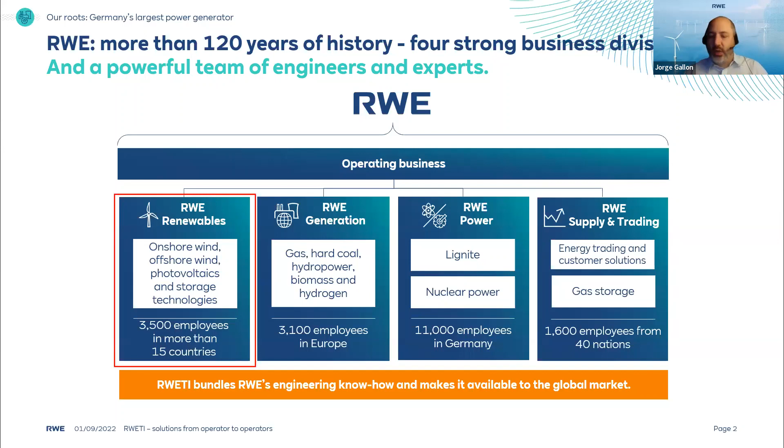When I joined RWE last year, I came from a completely different sector - I come from the banking sector. It was very interesting to me that the first thing they asked me is, are you a true believer? And I say, okay, a true believer in renewable energy as the leading solution for decarbonization? And I say, yes. And someone said, okay, you're in the right place. What do I mean by that?

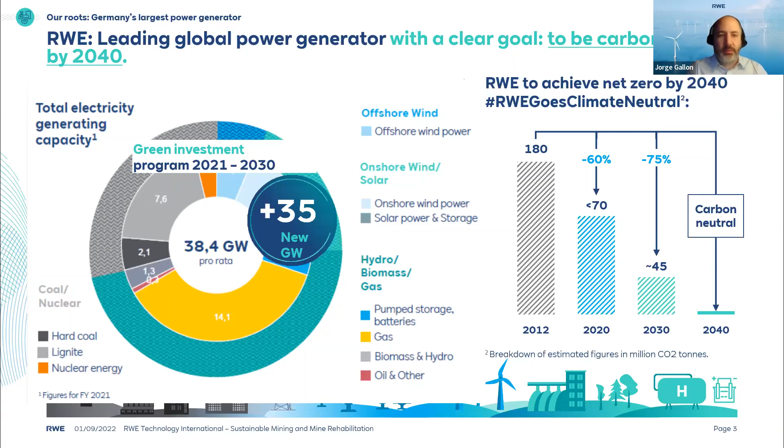Now, a little bit about who we are in Latin America. We are part of what is called RWE Americas. In Latin America right now, we have 40 plus staff focused on Mexico and Chile. The idea is to grow, but right now from a development perspective, those are the countries we're targeting. We're technology agnostic, focusing on onshore and offshore technologies.

Offshore is led by a different team, which is our global offshore team, but the team that I participate in - we are helping RWE to grow significantly with over 2 gigawatts of power by 2030. We're doing it in 2 different vectors: either by greenfield development or by acquisitions.

Right now, RWE TI is our partner to expand with advisory services for power and mining companies, not only in Chile and Mexico, but also now in Brazil. We still don't have a mandate to operate in Brazil as we do traditionally with Mexico and Chile, but they're being the tip of the spear trying to catalyze hydrogen decarbonization and other technologies.

One very important view of RWE in Latin America is that we have a buy and keep model. We have all the capabilities and we interact in every transversal stage of project development, from greenfield to development, construction, and operation. That sets us apart from the majority of developers that are just a little bit in buy and sell mode or looking for partnerships.

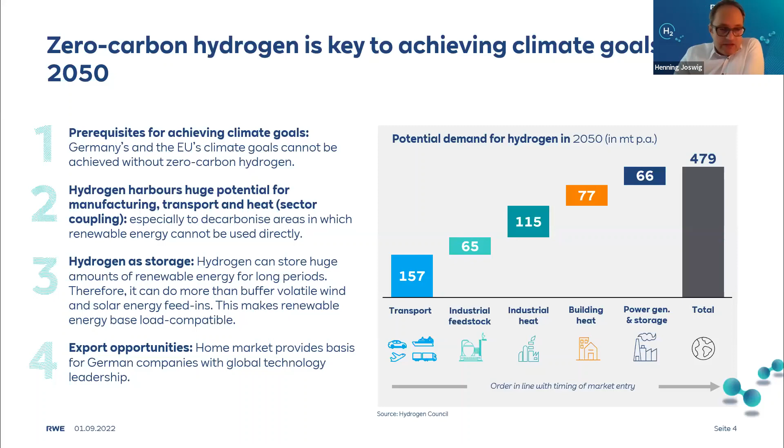Hydrogen can also be part of a global game. We may soon need to produce it in countries with a lot of available renewable electricity, and then transport it back to Germany, or maybe Europe, and use it there. I wouldn't say it's essential that hydrogen be produced only in Germany or Europe. From my perspective, it's a global game.

Here you can see where we stand. I think this chart is based on numbers from last year, but they're still valid. The key message is that there's still a way to go before green hydrogen becomes economic, or becomes very attractive for companies to use.

On the left-hand side you see steel production. With a current carbon price of 50 euros per ton, that's nearly half of the CO2 avoidance cost we have, so there's still a gap to be closed. On the right-hand side of the slide, you see the gap becoming bigger and bigger, showing a huge need for incentives for green hydrogen to become economic.

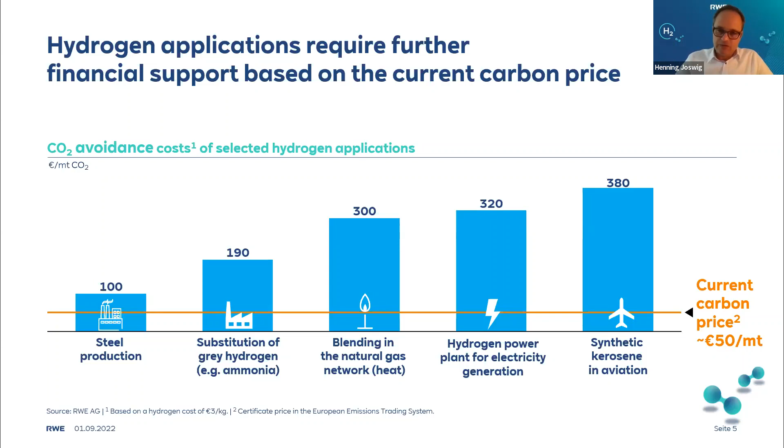This slide is just a schematic overview of what you can do with hydrogen when you link it to the power grid, fed by renewable electricity. In the center you have the electrolyzers, producing oxygen and hydrogen.

On the right-hand side you have an example of potential applications for hydrogen, starting with power to mobility, which is quite interesting from my perspective. As we saw in the previous slide, the transportation sector has huge potential to become attractive for hydrogen applications. So power to mobility is one point.

You can put hydrogen into fuel cell electric vehicles, but also into combustion engines. Then there's an even bigger potential in power to industry applications, where hydrogen is a core element and the basis for a lot of other projects in that industry.

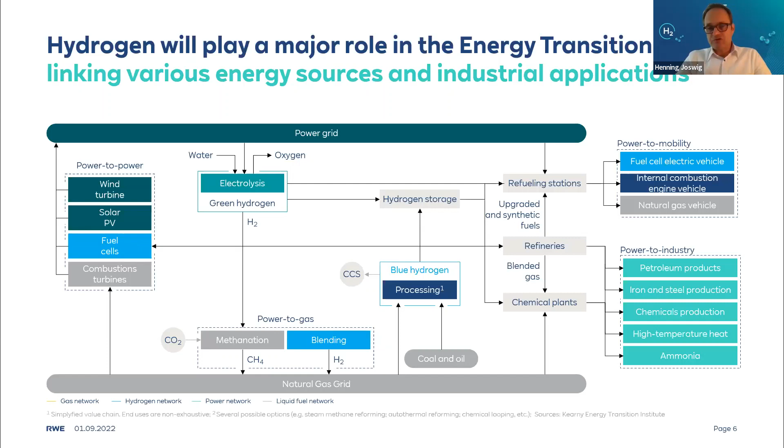Within RWE, especially in Germany, when we talk about hydrogen, we are linked to green hydrogen. On this slide, you can see that hydrogen theoretically has different colors, although hydrogen has no color. But it's easier to link a color to hydrogen so you understand which electricity source it was produced from.

RWE in Germany is focused on the right-hand side, on green hydrogen, meaning hydrogen produced only via electrolyzers, with electricity coming from renewable sources. In other core markets of RWE, such as the Netherlands, the UK, or even abroad in the United States, different types of hydrogen are also possible. We don't stick only to green hydrogen - this is a special focus for Germany.

Coming from the left-hand side of the chart to the right, when we talk about gray hydrogen, this is the traditional way of producing it. The hydrogen comes from steam methane reforming, and can also come from chlor-alkali electrolyzers. To be honest, I'm not sure anymore because of the high gas prices we have, but this was the cheapest way to produce hydrogen before the Ukraine crisis.

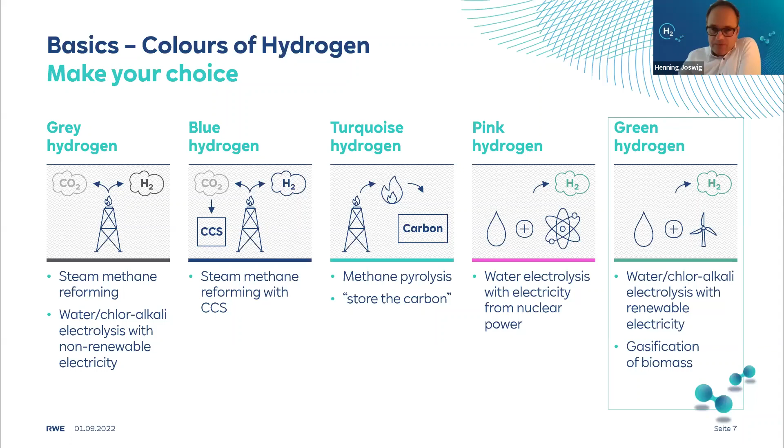With this slide, there's just a very schematic scheme showing that it's not so complicated to have an electrolyzer. You need green electricity, you need water demineralization, then you have the process cycle, mainly consisting of anode and cathode, and then you need power. As most of you have experienced in school, you get oxygen on one hand, and hydrogen on the other.

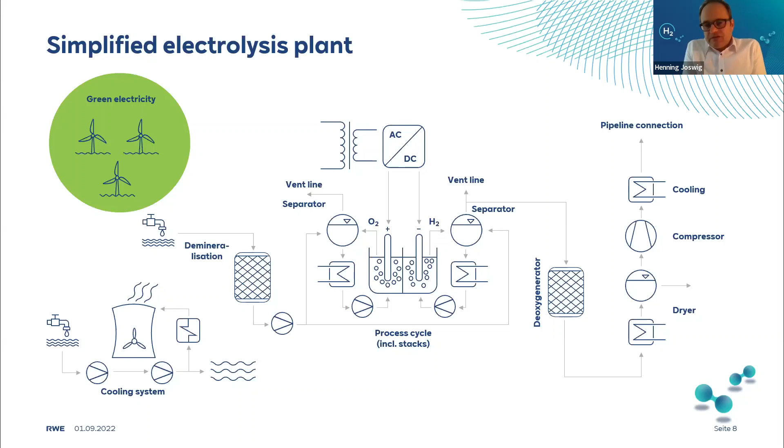After you have the hydrogen, you need a separator, and you have to run it through a deoxygenerator, and then maybe dry the hydrogen and do some kind of compression, and then here we are, you can use the hydrogen. You can produce each quality you want, from highest quality and purity of hydrogen up to normal hydrogen, which can be put into a gas turbine or whatever you think about.

When we talk about electrolyzers, at the moment there are a lot of technologies available, but within RWE we are focusing on electrolyzers which are able to be realized in projects beyond 100 megawatts each. This means we have to focus at the moment on the two most advanced technologies, the alkaline electrolyzers and the PEM, proton exchange membrane, which have high technical maturity. There are different technologies available, but they are in a younger stage and the maturity is not so high, so you can't realize projects in the big megawatt size, and therefore we are focusing on proton exchange membrane and the alkaline electrolyzers.

On this slide and the next, I highlighted some basics. What are the advantages and disadvantages? But I wouldn't say disadvantages, because when you make an electrolyzers project, each technology has its special features which might fit to your project. So on one project it could be an alkaline, and in the next one it could be a PEM, who is the most economic one.

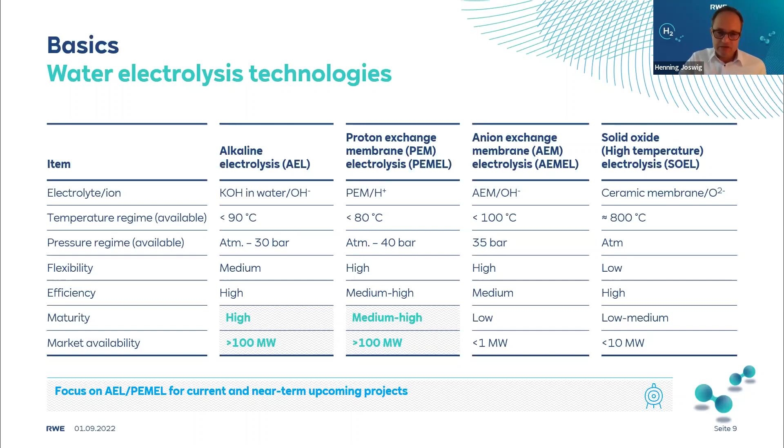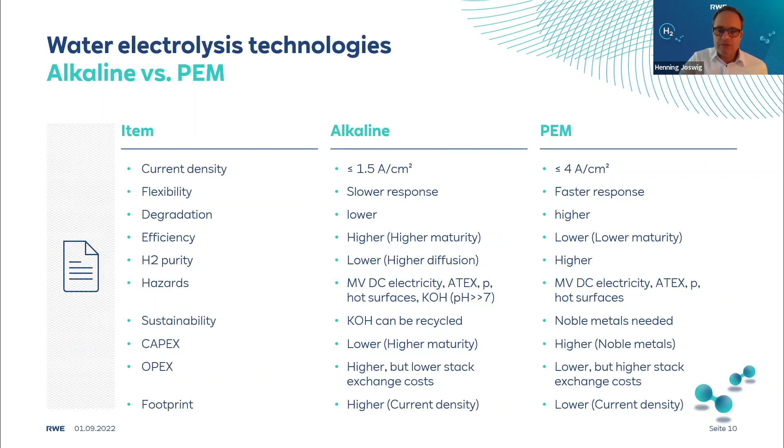And I think the potential for improvement is higher in the PEM, and therefore I would say the efficiency growth in PEM electrolyzers could be bigger than in the alkaline one. Some other characters and basics could be a reason for going for this technology, or maybe the other technology.

Coming to projects, because I don't want to talk only about theoretical things, I want to show you that we are involved in a lot of projects. There's also a lot of information available on the homepage of RWE, you can find the link on the right hand side. Just to give you an impression here about our projects in Europe - I must admit this is only a selection of our projects, because we have a lot of others in our company, but some of them are confidential and I can't disclose that we are involved, because we are also working for external clients and supporting them in their ambitions to become greener.

So to strengthen these activities, RWE has decided to have a dedicated board member for H2 at RWE Generation, and this is very good, because then you have the right attention for this very hot topic, and this is the right enabler to position us in the hydrogen business in Germany, in Europe, and also worldwide, because we see that hydrogen is key for achieving the national and international CO2 reduction goals, as I already said.

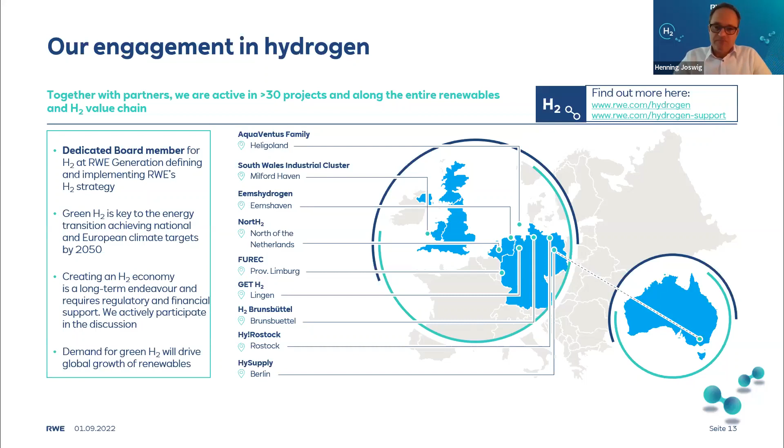Before I come to some details of the project in a couple of minutes, I want to stress that developing a hydrogen project is not an easy game. It can last up to 4 to 5 years to realize a project, from opportunity development until it becomes commissioned. We developed within our company a so-called stage gate process.

We have an opportunity development, and once the opportunity has a certain degree of maturity, we enter the ideation phase, which lasts 1 to 3 months. After the ideation phase, there's a stop, and we try to nominate the opportunity to enter the next level, early opportunity development, for approximately 6 months, to increase the maturity of the project and see whether it makes sense to follow or not. This continues from early opportunity into a mature opportunity, until the project development. This is the process.

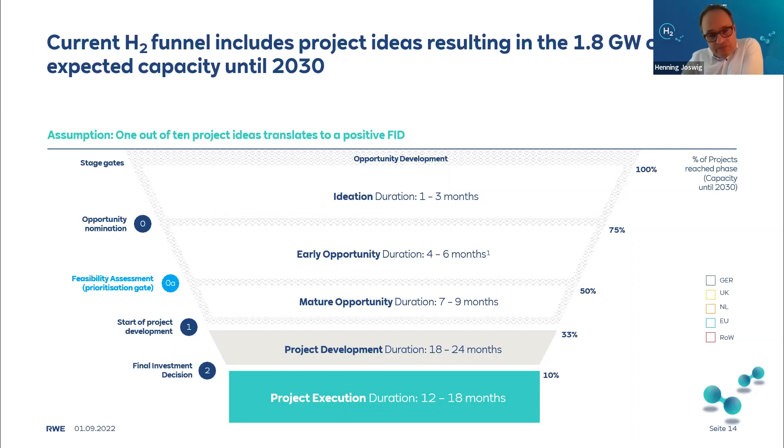On the right-hand side, you can see the amount of projects you need to become successful. Starting in opportunity development with 100% of the project, based on our experience, approximately only 10% of this will be realized. This is a big burden, because you need a huge amount of projects in development so that at the end you have a successful project on the table. When you have ambitious growth targets, you can derive from these numbers how many projects you need.

This is shown in this slide. What does it mean for a goal of nearly 2 gigawatt of electrolyzer capacity to be operated in 2030? We are now in 2022 on the left-hand side, and you can see nothing is commissioned yet. But this doesn't mean we are not involved. Taking into account the stage gate process with many projects going through it, in 2024, or maybe next year, we will disclose the first projects that become commissioned. Then, based on the amount of projects we have, the curve grows very fast, so we end up with 1.8 or nearly 2 gigawatt of installed electrolyzer capacity in our portfolio.

This means that when you theoretically want 1.8 gigawatt of installed capacity running, and this represents only 10% success rate, you can calculate how big the project portfolio needs to be that you have to develop.

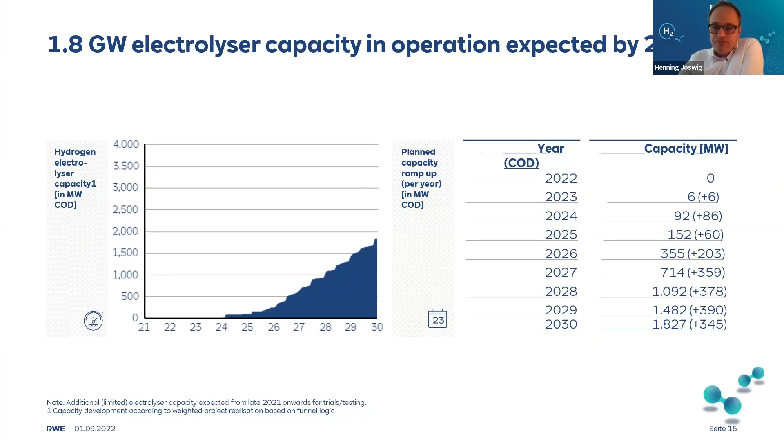This is where we as RWE Technology come into the game, because we are able to support our RWE company and sister companies, and also external clients, in the whole value chain of a project—coming from a conceptual stage until the commissioning of a power plant. The reason I showed this slide in different colors is that the light blue color represents the few projects we're active in, mostly on the left-hand side. Nevertheless, the first successes will come soon, in the next 2 years, when we probably announce the commissioning of different electrolyzer power plants. RWE Technology can offer services across the whole range, from conceptual study until commissioning.

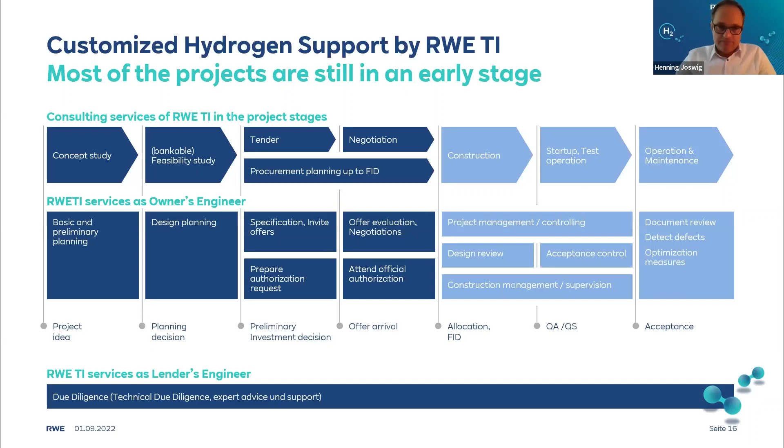Here in a nutshell are some of the projects we are working on. On the left-hand side is one of our earliest lighthouse projects, called GetH2 Nukleus. It's a big initiative in Germany to install the first 100 megawatt electrolyzer plant in Lingen. Lingen is a gas-fired power plant site of RWE, and we use this property to install the electrolyzer there. COD is planned for 2024.

We are also involved in different projects up to gigawatt size, always with partners, to mitigate our own risk and to push the project forward. It's easier to do it in a consortium.

And for example, this Aquaventus is also a very big initiative, an offshore initiative, where the target is to install up to 10 gigawatts of electrolyzer capacity in the North Sea. The beautiful island Helgoland will serve as a central hub, because some of the offshore wind parks are more than 90 kilometers from the coast, and it's not possible to sail there and back within one day for maintenance work. So we have a central hub on an island close to those wind farms.

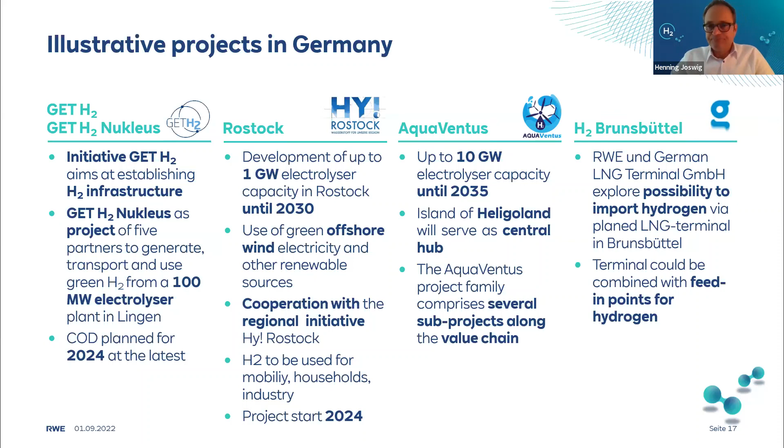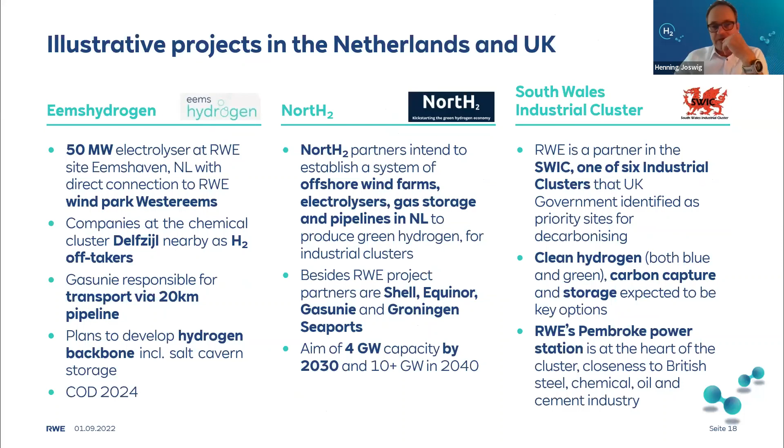We have here, let's say, Eemshydrogen on this slide. It's a 50 megawatt electrolyzer plant, also at an RWE power plant in the Netherlands. It's also very well developed and will come to commissioning soon.

Coming back to the GetH2 initiative we are involved in, there's further additional information available on the internet. The aim is that we build this electrolyzer plant on an existing power plant site of RWE, connect this electrolyzer with a wind farm in the North Sea, and then we are producing hydrogen.

The hydrogen is fed into a pipeline, and the pipeline goes in two directions. On one hand, close to Lingen there's a refinery of BP, which will be served by green hydrogen. And there are other customers more than 130 kilometers away from Lingen, also connected via this pipeline system to the plant. So we put the green hydrogen into the pipeline and transport it over 130 kilometers to the customers in the Ruhr area.

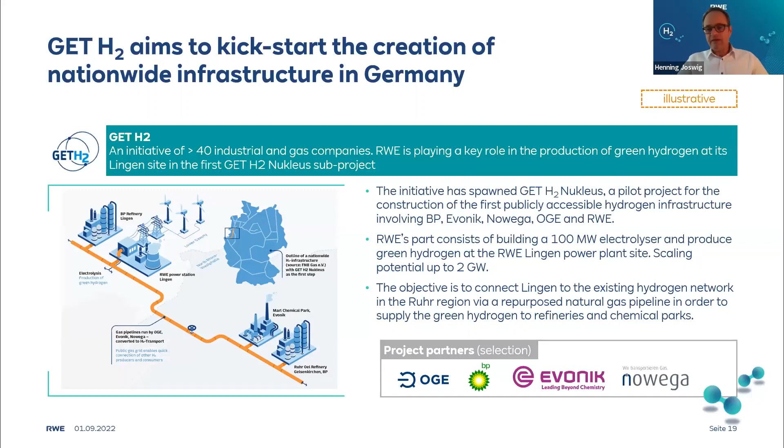Here you can see how it will work. It's a gas-fired power plant, and as you can see, the electrolyzers will be put there. The big advantage is that you can reduce your capex due to the fact that you can use the existing infrastructure and share it, which might help you become more economic, or faster economic, with your project, because otherwise you have to put everything in place regarding water supply, grid connection, and hydrogen offtake.

So what does it take to develop a hydrogen project? It's partially very complicated, and what I see when I talk to customers we support in their ambitions to become involved in green hydrogen, you have to be clear what you want to achieve. You should avoid doing hydrogen just because hydrogen is a trend. You have to be clear what to do with the hydrogen.

Sometimes we are approached by customers in the middle of nowhere who want to produce hydrogen, but there's nothing in place. There's not enough fresh water, or even a pipeline to put the hydrogen into, or a way to use it in their processes.

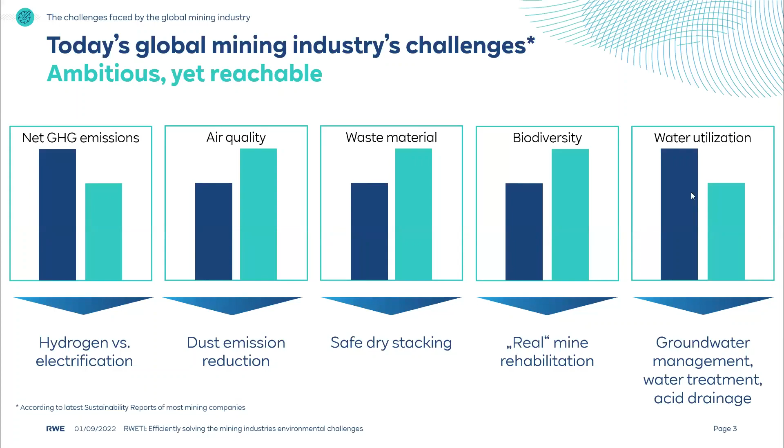So I would like to start with the major topic in this presentation, which would be greenhouse gas emissions. As Mr. Joswig already pointed out, hydrogen will play a huge role in all kinds of industrial activities worldwide, and mining is no exception. So there are a lot of activities at the moment to incorporate hydrogen into the available or future equipment being operated worldwide. This would basically replace the fuel that trucks and excavators are based on, from mainly diesel up to hydrogen in the future.

But of course, hydrogen comes with some disadvantages. And the first one is, of course, you need the infrastructure. The infrastructure to transfer hydrogen to remote locations, which mining basically operates in, is a challenge in itself.

On the other hand, we have electrification. That could be battery-powered trucks and excavators, which is also in the pipeline for the coming years, and all major OEMs are looking into this technology. But this technology itself comes with disadvantages, such as the low energy density of batteries in general. That means either a lot of new investment into a bigger truck fleet, or technologies that are not really proven at the moment, like changing batteries in the production process. So there are also some disadvantages.

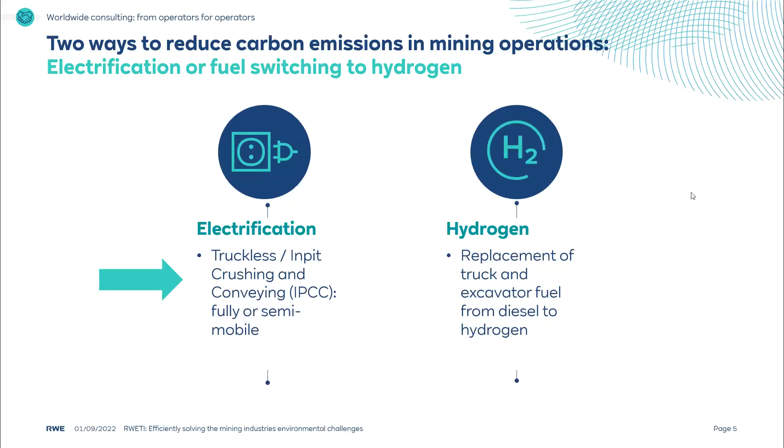As you're familiar with, the current technology that a lot of mining operations are based on is shovel and truck. So you have an excavation phase, drilling and blasting, extraction, and then transport by truck either to the waste pile or to the plant where the mineral or coal is treated.

The first step to incorporate belt conveyor, so electric powered technology, into that system is to use intermediate crushers in the operation very close to the actual excavation front. These crushers can be either relocated from time to time or located permanently. By this shift to this technology, you reduce both the vertical and horizontal distance that the material has to travel.

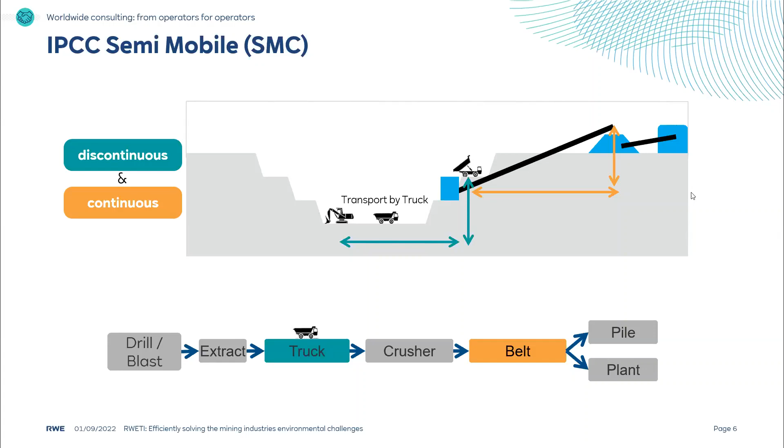That's basically the first step, and this is actually what is being used quite regularly worldwide at the moment, especially in Chile and Brazil. This would be an example of a semi-mobile crushing facility. As you can see, it's a usual dumping process into the crushers, in this case jaw crushers, that crush the material and convey it onto the belt conveyor towards the point that it has to go to.

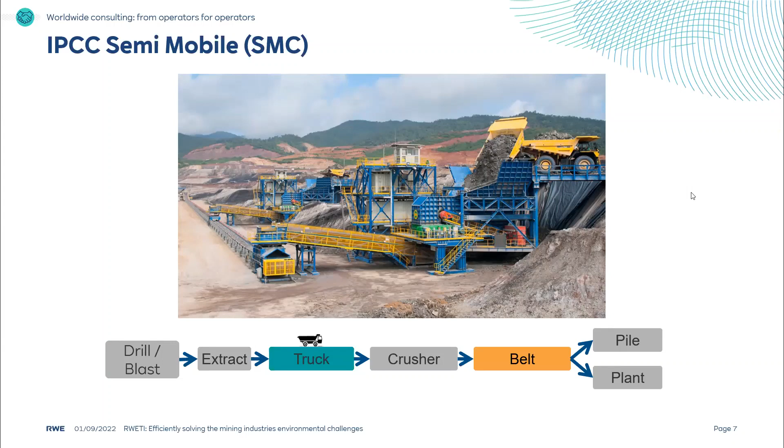If we're talking about an even more drastic version of this approach, in-pit crushing and conveying, that would be the fully mobile system. In this system, as you can see in this slide, trucks are eliminated entirely. So an operation using this kind of strategy doesn't have any diesel-powered trucking equipment. That's already a huge reduction in the emissions that diesel is involved in.

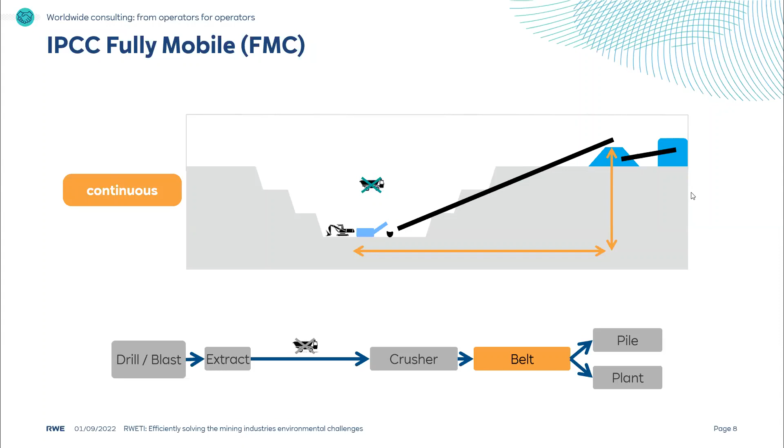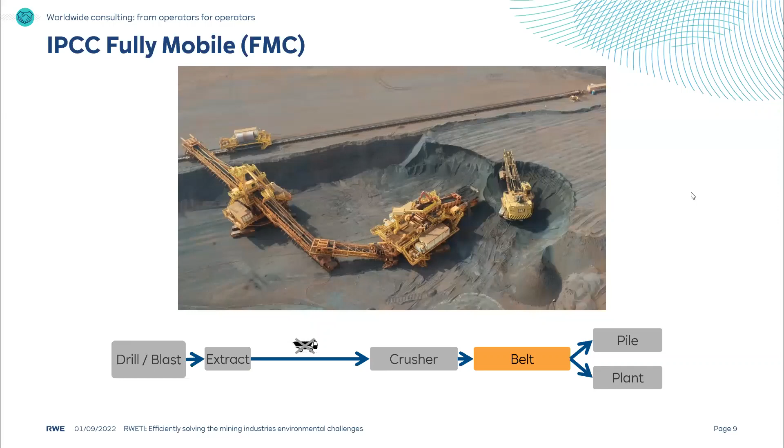But that still leaves the excavators being powered by diesel. Of course, there are also solutions for this challenge, as excavators can be powered by electricity as well. If you have that kind of technology, as you can see in this picture of the S11D mine in Brazil, which is entirely based on continuous equipment, you basically eliminate all diesel equipment, with exceptions for things like road development and maintenance. But the main equipment is electrically powered.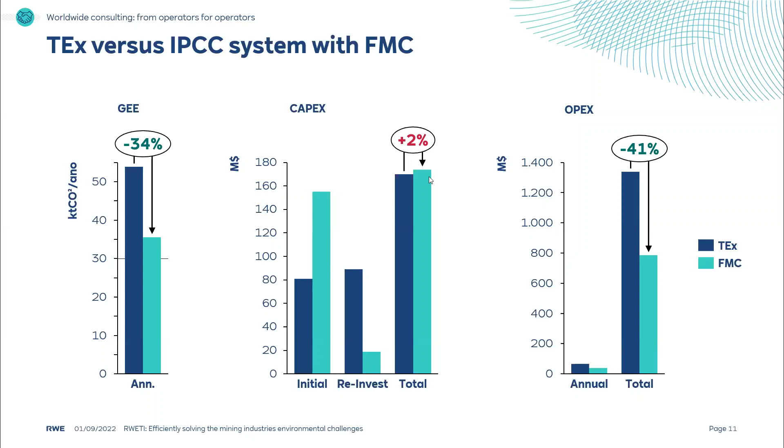Of course it's not only about greenhouse gas emissions and costs being involved, but there are a lot of key factors or key points to consider when comparing those technologies. This is mainly influenced by the geology of the deposit you're working in. So there would be deposits very suitable to incorporate IPCC equipment configuration. On the other hand, there could be geological constraints that rather forbid using IPCC, and shovel and truck would be the most favorable solution. So that is one factor.

The masses itself, so how many tons does the operation need to transport, plays a huge role, as generally IPCC is used in high production operations in comparison to low operations that are probably not suitable for IPCC operation. The OPEX and the CAPEX we already talked about.

That is one important point in the strategy of a mining corporation to consider, as a fast return on investment is on the other hand not the easiest thing to do with an IPCC operation, as this needs a longer life of mine to amortize over time.

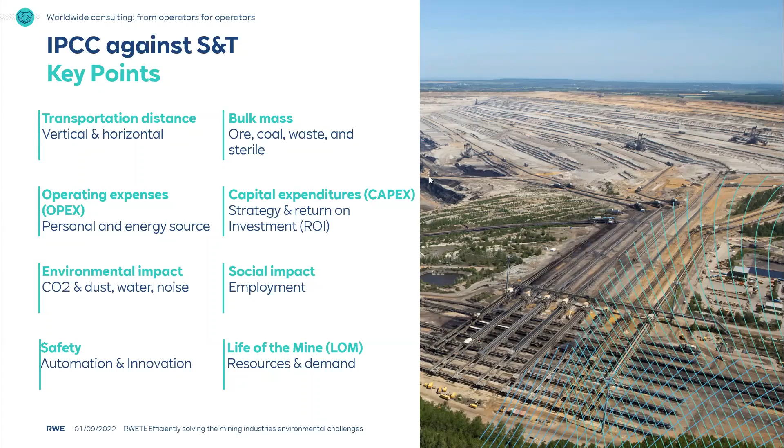So I already pointed out dust emissions, or air quality in general. From our experience, the most economic way to operate is to just avoid creating dust. There are several ways how we can do that. Or if you can't avoid creating dust, at least limit the dust integration into the air at the equipment.

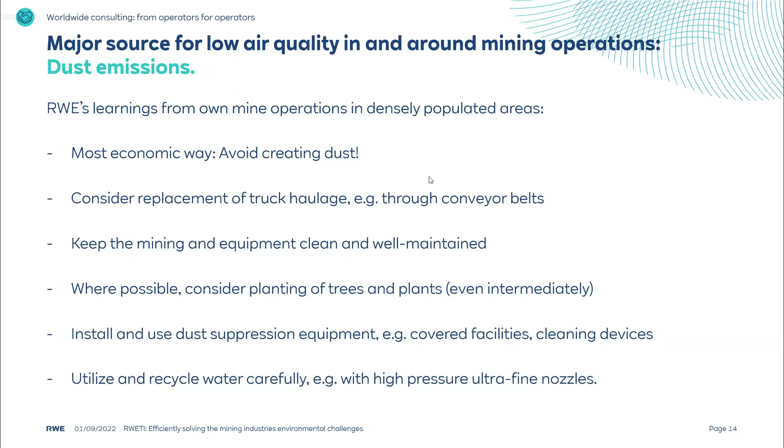That can be done by replacing, as I said, trucks with conveyor belts, which are much better suitable for dust control. Keep the mining equipment and all kinds of activities clean and well maintained. What is always a very good way to control dust emissions or to limit the impact on the environment is to use greenery like trees and plants, even in the operation itself, to bind the dust and limit the impact. And last but not least, to utilize dust suppression systems like belt scrapers or water-based belt cleaning equipment, and cleaning equipment in general.

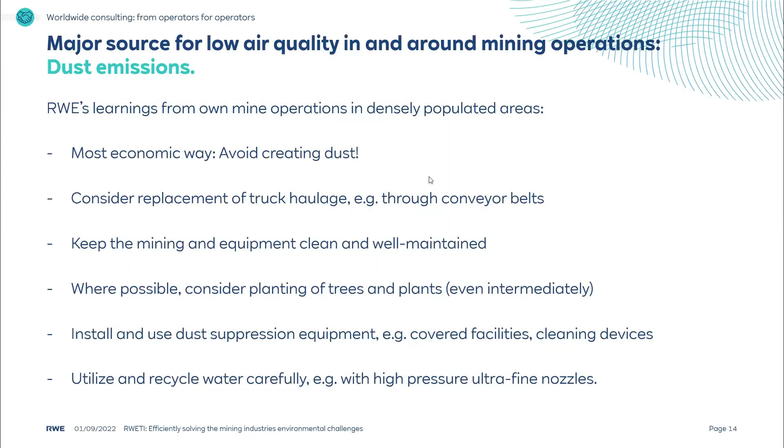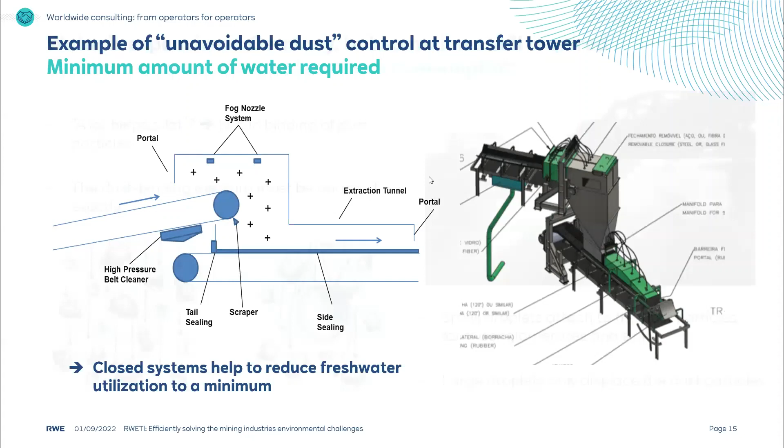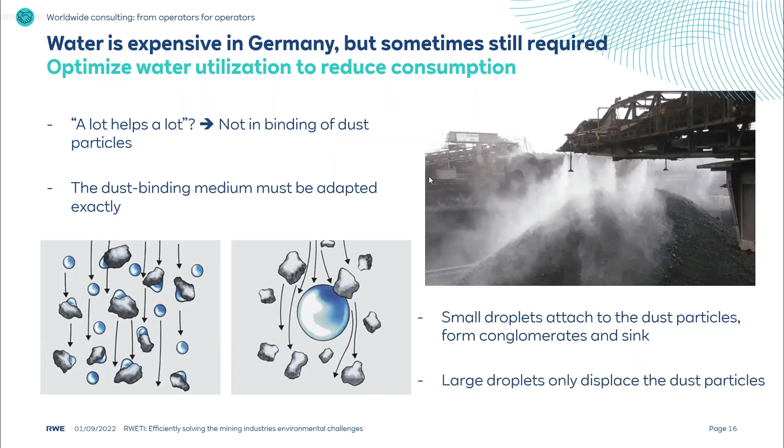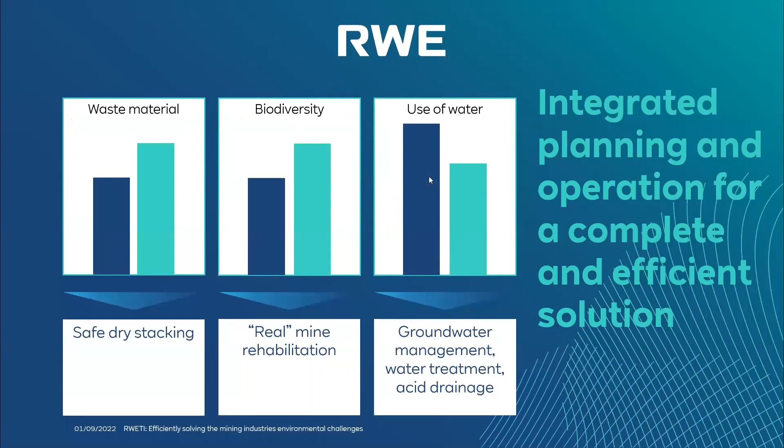So the next three topics that I mentioned - waste material, biodiversity, and use of water in general - are combined into the next chapter, and I would like to start with waste material. As I said, the stripping ratio in operations worldwide is getting worse and worse, which has to do with the lower grade of the ore, the deeper location of deposits, and the location of the operation itself.

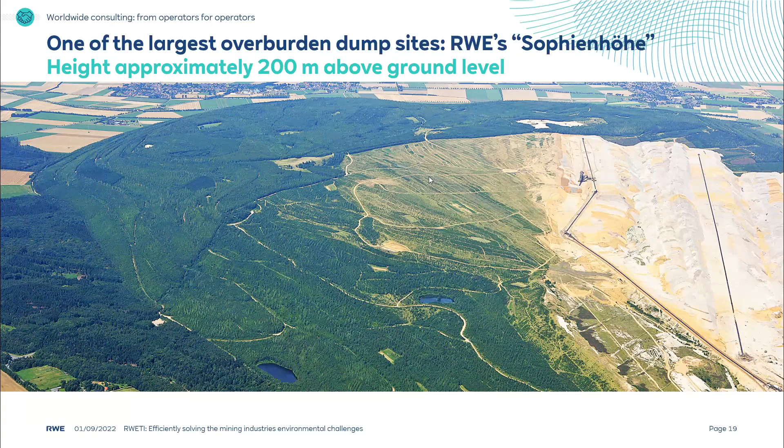One very good example of how, in our experience, waste should be handled in a safe and feasible way is shown in this picture - the Sophienhöhe, one large waste pile in one of our operations, which at the moment has a height of almost 200 meters, with another 400 meters into the mine you can see on the right-hand side. So that's a structure of almost 600 meters that has been built by spreaders and belt conveyors, and it's still very stable and also used for reclamation purposes, as you can see in this picture.

To guarantee that these kinds of structures can be safe and stable in the long term is actually much harder than one would think. In this instance, we use different kinds of technologies to guarantee that the structure will be stable for many more years, up to the ending of the mining activity in this mine.

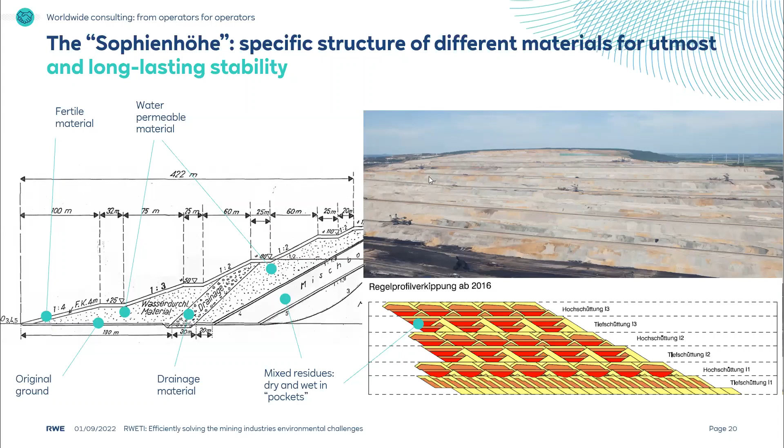What we do is create a kind of honeycomb structure, where the spreaders work in different operation modes to guarantee that this red or brownish material stays where it is and doesn't move at all. On the other hand, we also have to guarantee that water drainage is always maintained in these waste piles, as a high water content in a waste pile like this will create an uplift, and this has to be prevented at all times.

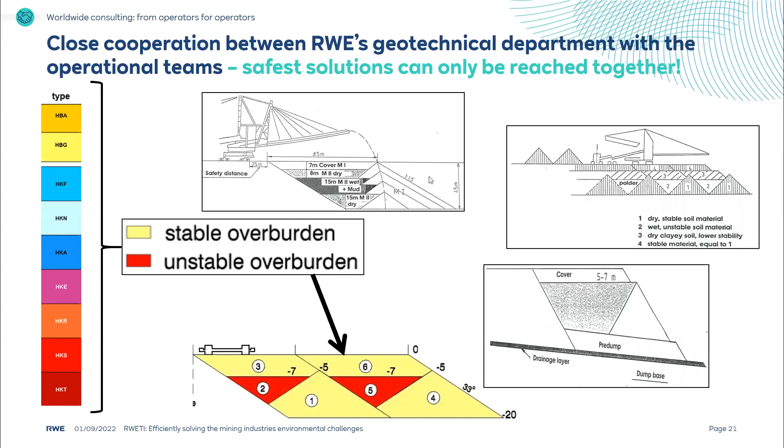So when we talk to customers about how this kind of technology can be incorporated, we first take a look at what kind of material is actually available in a mining operation. It highly depends on a lot of geotechnical constraints, like the availability of the material, the structure of the deposit, and the water content of the waste material, and whether the equipment is actually able to create structures like this. That has to be taken into consideration when talking about a safe construction of a waste pile.

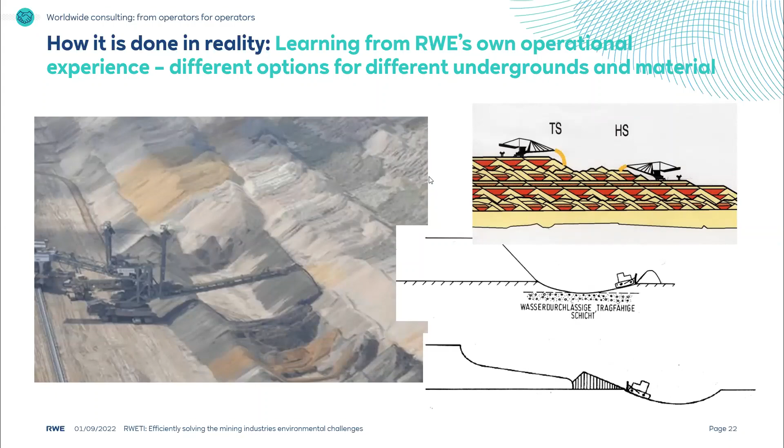Especially after the Brumadinho disaster in Brazil, a lot of customers ask us about this kind of approach. We always tell them, take a look at what we do in our operations. Let's think about how this can be incorporated into the client's operation and what kind of equipment is needed to guarantee such an approach. This should be done as soon as possible in the planning phase of a new operation, as this determines how it can be done later on.

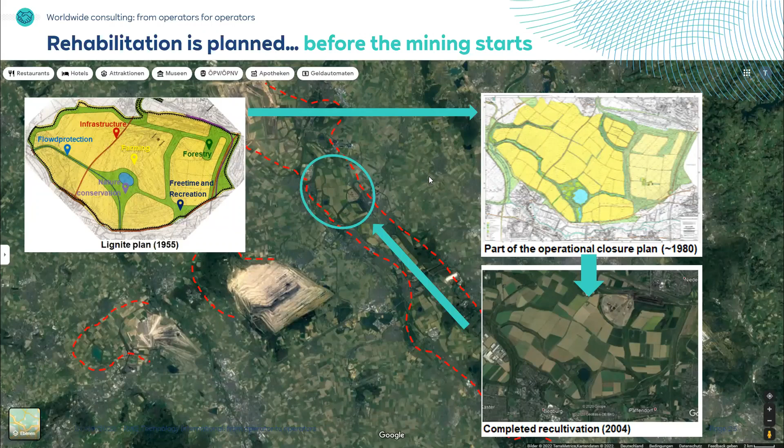What is always important for us and for clients worldwide is to consider how the material that the rehabilitation and recultivation is later based on should be stored and dumped later onto the surface. Another aspect is, of course, what kind of vegetation can actually be planted in the new landscape, and whether this vegetation is suitable for the specific region it's used in.

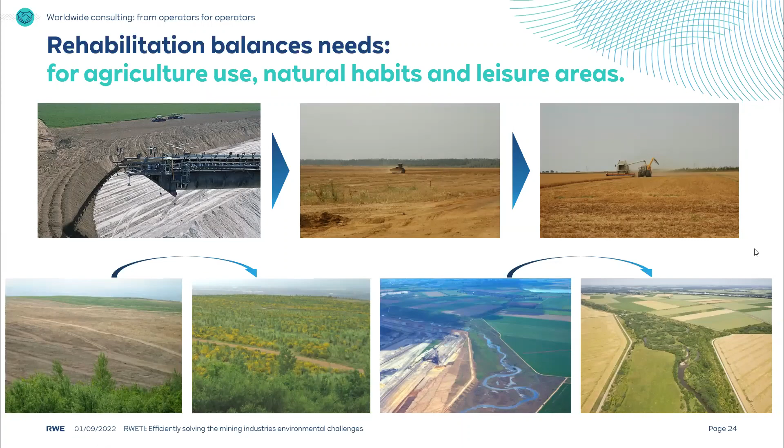To give you an example of the actual area we're talking about, there are almost 300 square kilometers in this Rhenish area from RWE, and almost 220 square kilometers are already rehabilitated or recultivated, which is basically farmland, forest, but also other uses like walkways, paths, leisure activities, and so on. On top of that, we're talking about over 3,000 animal species, and many thousands of plants that have been successfully relocated in this area.

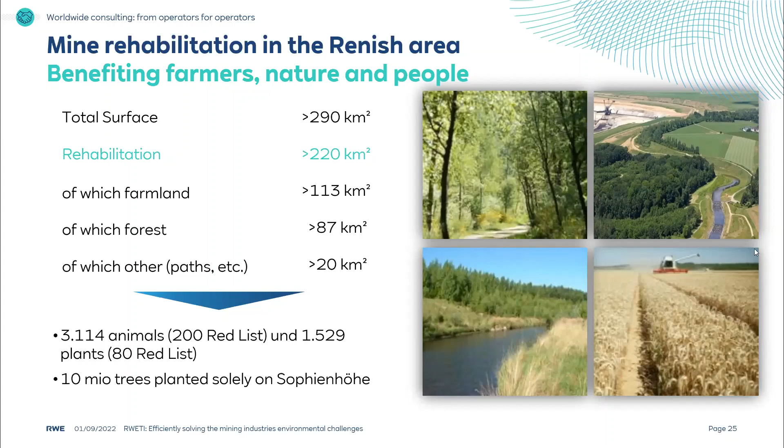So just in the outside dump that I was showing you some slides ago, we're talking about 10 million trees that have been planted in this location.

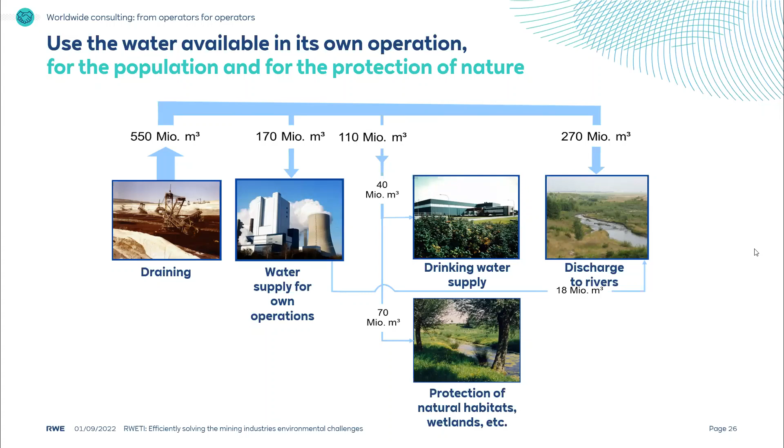About the water use, it's very important to consider how much water actually has to be drained from an operation and what the use of that water could be. Is it only water used for discharge into rivers to lead it away from the operation, or can it be used, for example, for cooling purposes, drinking water purposes, or especially for protection of habitats? This flow chart shows the general quantities we're talking about in the RWE mining area: more than 500 million cubic meters of water drainage and dewatering every year, and the corresponding shares that this water is being used in.

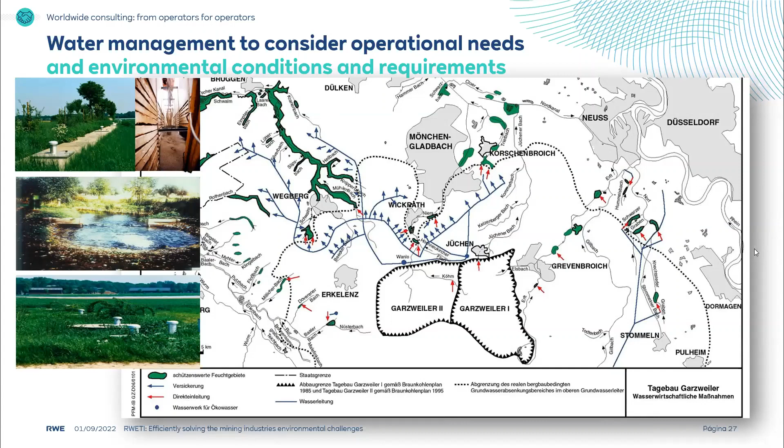Also, a very important factor when talking about drainage of mining operations is how it affects the wetlands, or basically the vegetation in the surroundings, as in general you have a huge area that is being affected by this drainage activity. In this case, it's one part of our mining area, and as you can see in these blue lines, there are a lot of measures that have been done to guarantee that not only are the wetlands being supported and kept from drying out in the future, but also the drinking water supply of nearby villages and cities is being secured.

So that was actually it. Thank you very much for your attention, and I would be happy to answer all of your questions.